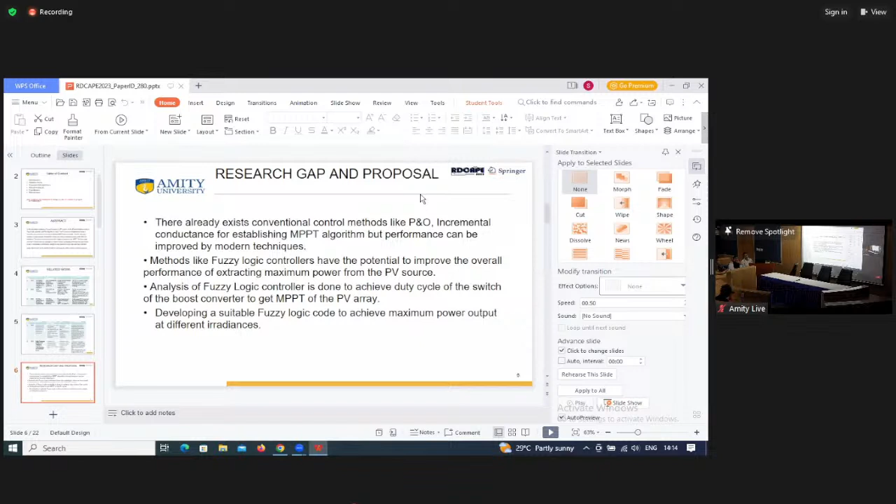So we use a boost converter in this circuit to improve the voltage level in order to get the highest possible output power under different irradiance. These are the algorithms of the Perturb and Observe method and the fuzzy logic which I have used for making the MPPT and controlling the duty cycle of the power converter used in the circuit.

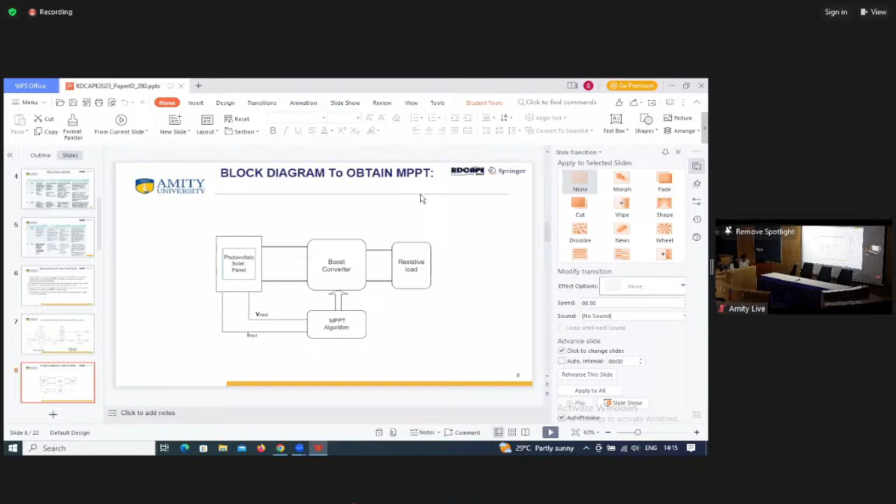This is the block diagram of the circuit to obtain the MPPT. We use a photovoltaic solar panel where we take the input voltage and input current at different irradiances, and then by using the two algorithms we conclude a duty cycle which will be fed to the boost converter switch, so that we can obtain a particular voltage and power on the output side. The output side has a resistive load which has been used to measure the power obtained.

So the system parameters which I have taken are shown below. The resistive load which I have used is 23 ohms, and the capacitor is 1734 microfarad. The inductor used in this circuit is 162 millihenry.

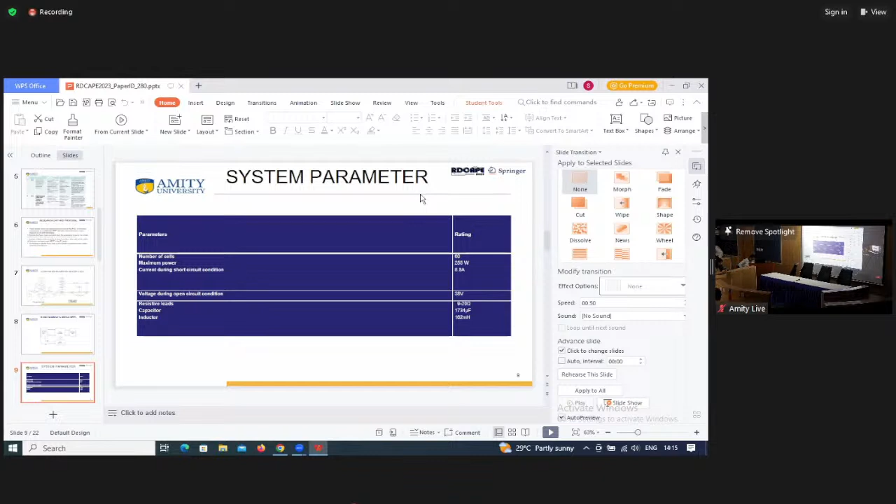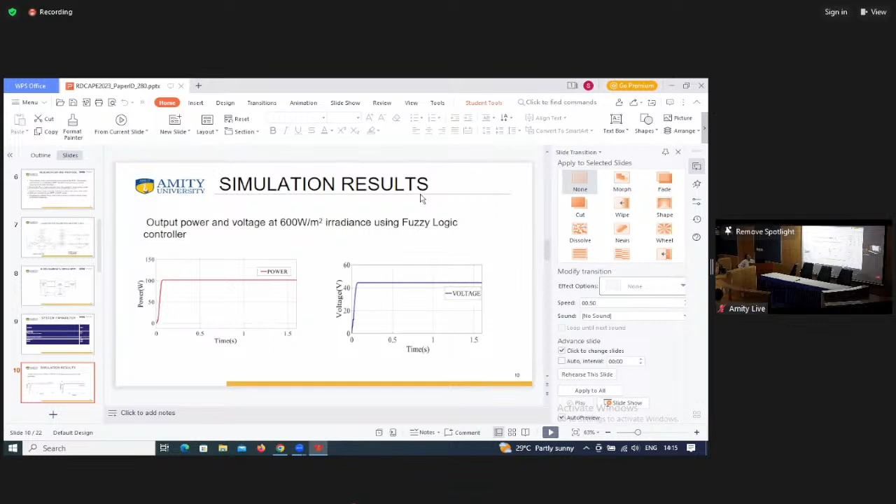This is the simulation results which I have obtained at different irradiances. I have taken three irradiances for comparative analysis: 600, 700, and 800 watts per meter square. This is the result of the power output and voltage output at 600 watts per meter square irradiance using fuzzy logic controller, and this is the 700 watt per meter square irradiance readings. Similarly, I have obtained the 800 watt per meter square results.

In this graph, I have shown the change in output power and voltage at varying irradiance. It is seen that when the irradiance changes, the output power also changes, and the voltage obtained also changes in this resistive load circuit.

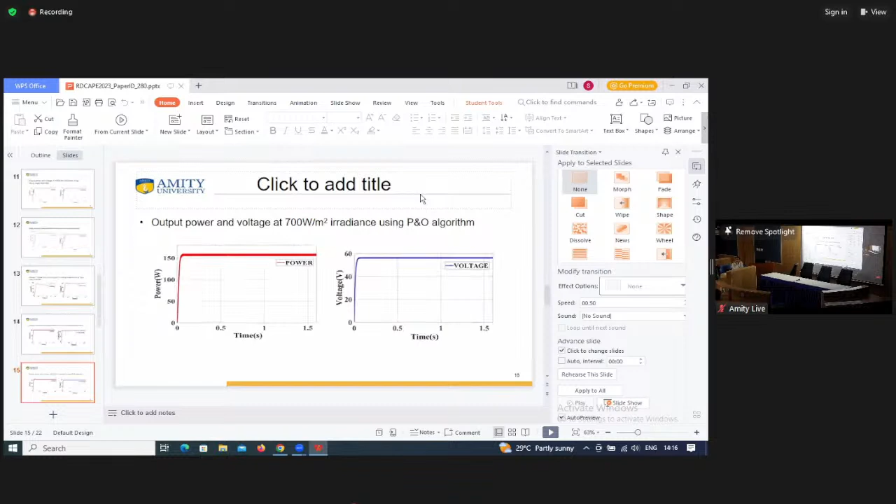Similarly, I have taken the Perturb and Observe algorithm readings at 600 watt per meter square irradiance, 700, and this value is obtained, and even at 800 irradiance. So under the similar condition of changing irradiances with this Perturb and Observe algorithm, we see that the power output and voltage output also change with the change of irradiance on the input side.

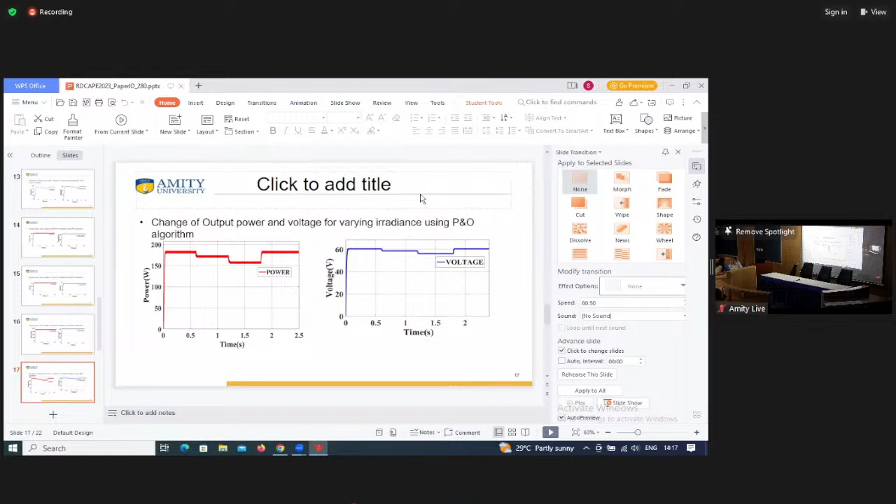So after comparing all the parameters between the two logics under similar parametric conditions, it is obtained that the fuzzy logic extracts much more power and voltage, and the overall efficiency of the fuzzy logic controller is 2% more than the Perturb and Observe algorithm, and this is because of the converter parameters introduced in this circuit.

The conclusion states that this circuit has been designed for MPPT analysis under resistive load condition. As a result, the irradiance changes and the power extracted also changes, and the output voltage also alters because of the change of irradiance. The variable voltage can also be utilized for various purposes, and if it can be made constant, then the power extracted at different irradiance can be used for numerous purposes.

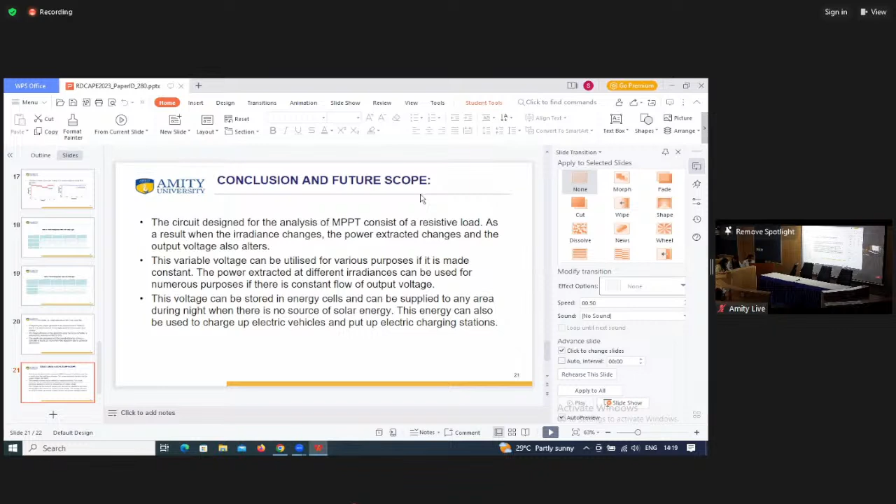Just tell me why you choose fuzzy logic for this purpose. There are various latest algorithms available, for example some meta-heuristic approaches. You may use those algorithms and surely you will get better results.

Sir, the metaheuristic approaches which are being used nowadays also give an output, but the fuzzy logic algorithm I have utilized here is much more efficient than the fuzzy logic algorithms which have previously been used, because of the change of ranges which I have taken by studying all the previous papers and journals for this purpose. In today's world, most electrical appliances are going to use AI and machine learning algorithms to do their work.

In earlier times, the actual problem with fuzzy is that you have to choose the parameters manually initially. How many linguistic variables have you taken here?

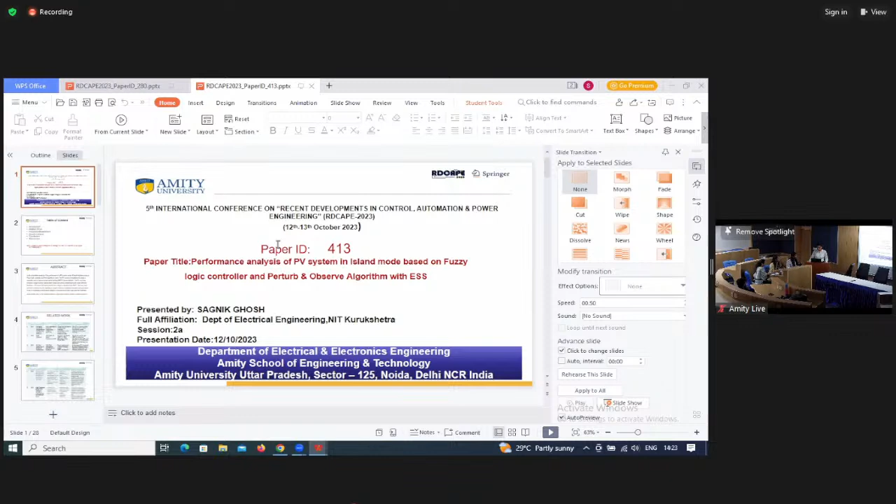Now I am going to present my second paper, performance analysis of PV system in island mode based on fuzzy logic algorithm and Perturb and Observe algorithm with ESS, energy storage system.

So in this paper, like in the previous paper, we have shown the fuzzy logic algorithm and Perturb and Observe algorithm. We have made a comparative analysis between the two algorithms, and we have obtained a certain output based on that.

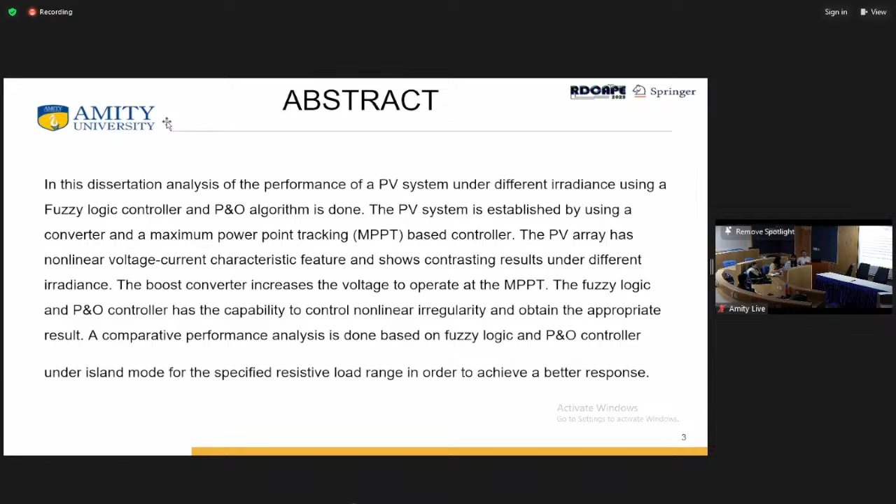By comparing this output, we have observed that when we use a resistive load, the energy obtained on the output side is also varying with the input irradiance. So this energy can be utilized if we can stabilize the voltage at a certain level for change of irradiance. For this purpose...

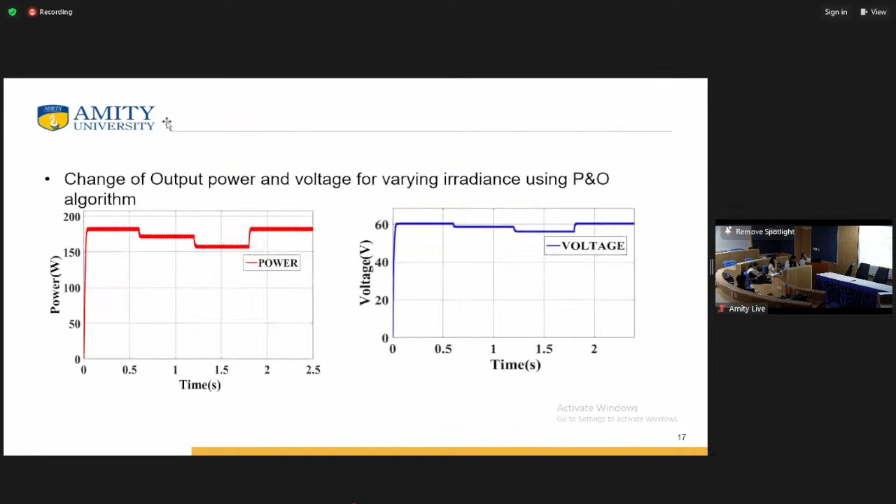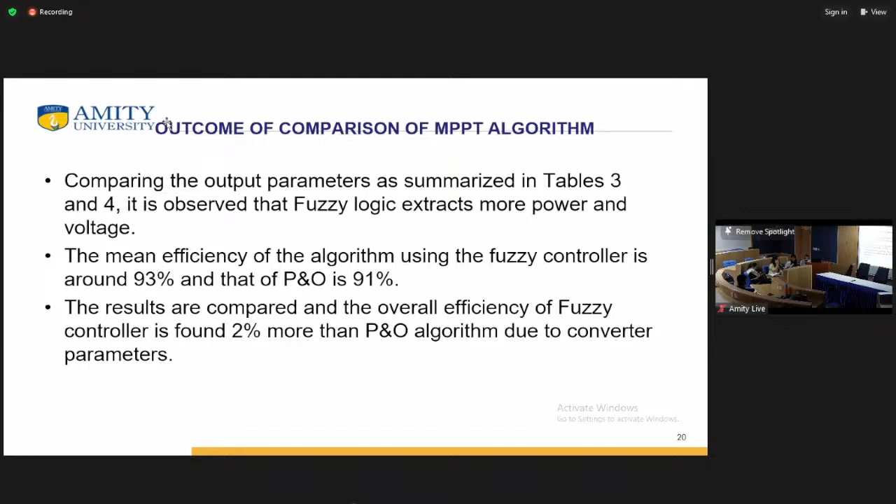I have first compared the two algorithms and have shown that the fuzzy logic algorithm is getting a better result than the Perturb and Observe algorithm. Now this circuit, which has a resistive load, will show this variable change in voltage

on the output side at different irradiance, and this can be solved by using a PI controller on the output part, which will be fed to a battery to store the energy. This energy stored can be utilized by electric vehicles and can also be used for putting up charging stations.

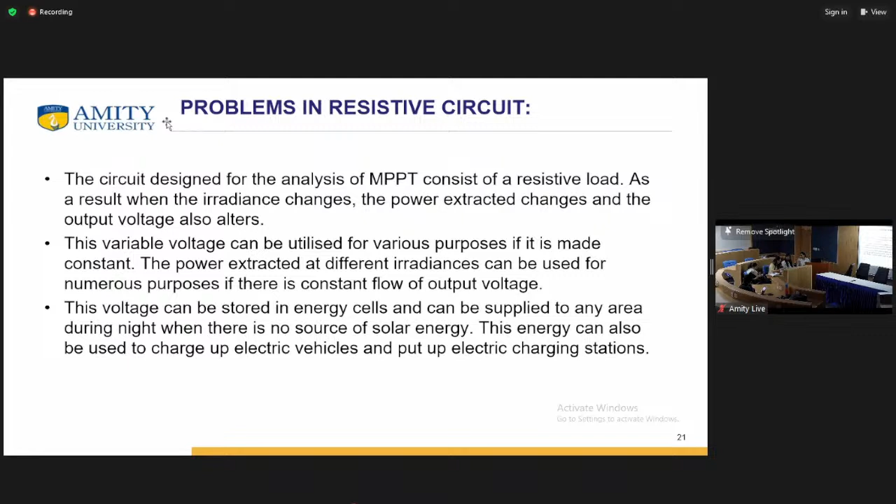This is the block diagram of the circuit which I have made by improving the MPPT algorithms. A PI controller and bidirectional converter has been used across the resistive load, which will be connected to the battery. The battery input, output, voltage and current readings will be fed to the PI controller, which will automatically control the duty cycle of the bidirectional converter for obtaining a constant voltage on the output side at variable irradiance.

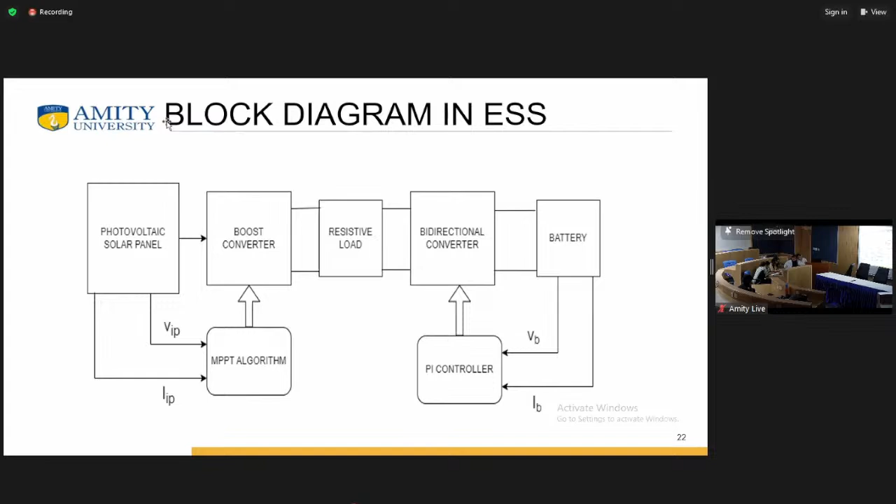This is the voltage, and this is the irradiance which I have taken to show this process. At first, this is the change of irradiance with respect to time, with a time period of 4 seconds taken here. The irradiance is changing from 300 watt per meter to 400, then increasing to 450 watt per meter square, and then decreasing to 400.

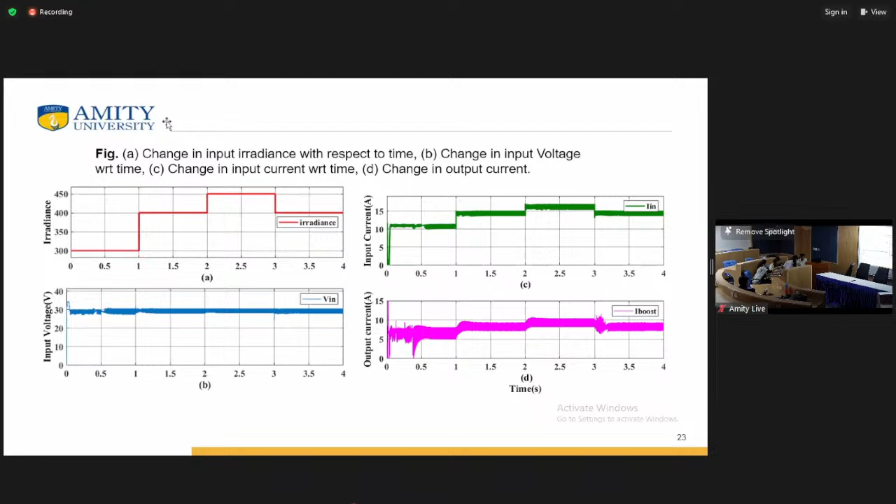Similarly, the voltage on the input side is also varying a little bit, and the input current is also varying. The output current shown will also be changing because of the duty cycle on the input side and the duty cycle of the converters.

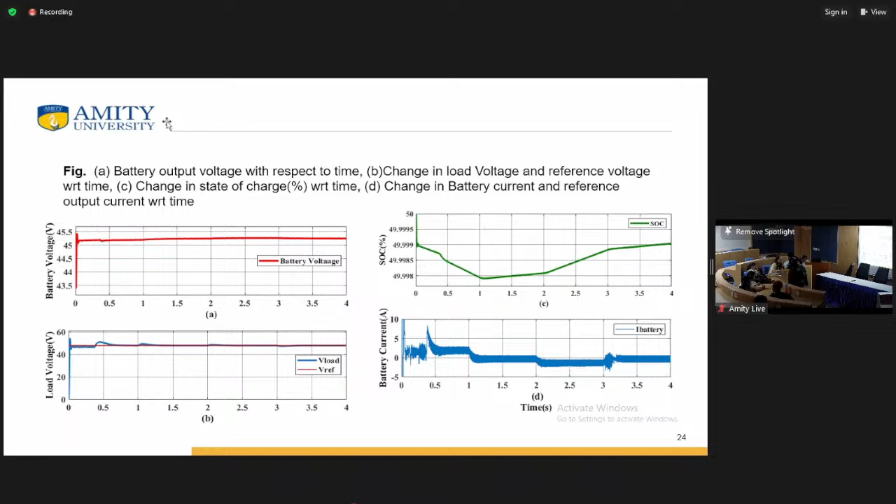The battery current is also changing. At first, when the battery is discharging, the battery current is on the positive side, and when the battery starts charging, the battery current becomes negative and is on the negative side.

The future scope of this is that the system can be used for G2V and V2G operational mode conditions. The charging time has to be reduced through proper planning, and efficient models of charging stations can be designed for extracting optimal power in the least time.

Various developments have been made for making this output system more powerful, and if another automated system can be made on the output side to feed the bidirectional converter, the output can be extracted on the battery side, and the efficiency will also increase.

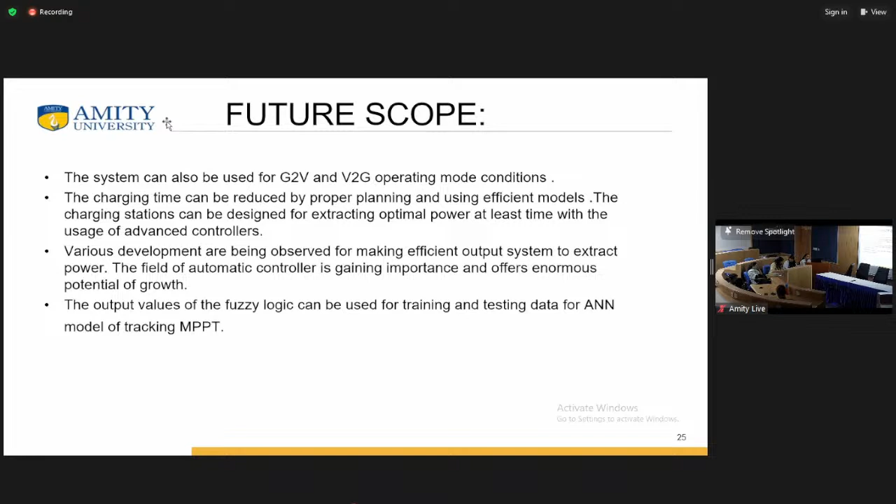The output values of the fuzzy logic can be used for training and testing data for an ANN model for tracking the MPPT algorithm. In conclusion, it is seen that the fuzzy logic is one of the most efficient models when comparing it with the normal incremental conductance method, PI controller method, or even the perturb and observe algorithm. The system is designed to track MPP at various irradiances.

We have also achieved a model where we can stabilize the output voltage so that we can use it for the battery, and for other purposes, especially for charging electric vehicles, and also for sending electric power for other purposes in places where there is no supply of energy.

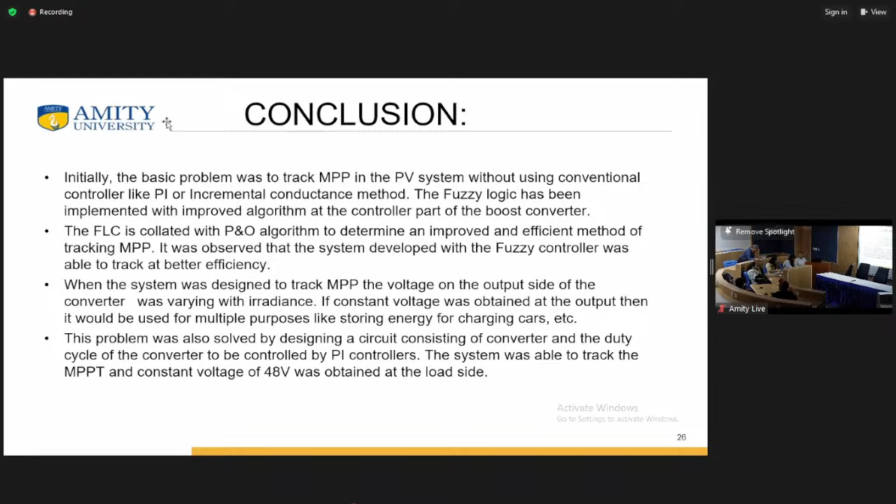A constant 48 volts is obtained at the resistive part when using this bidirectional converter, and a PI controller has been used for these purposes. These are the references which I have taken for solving this problem.

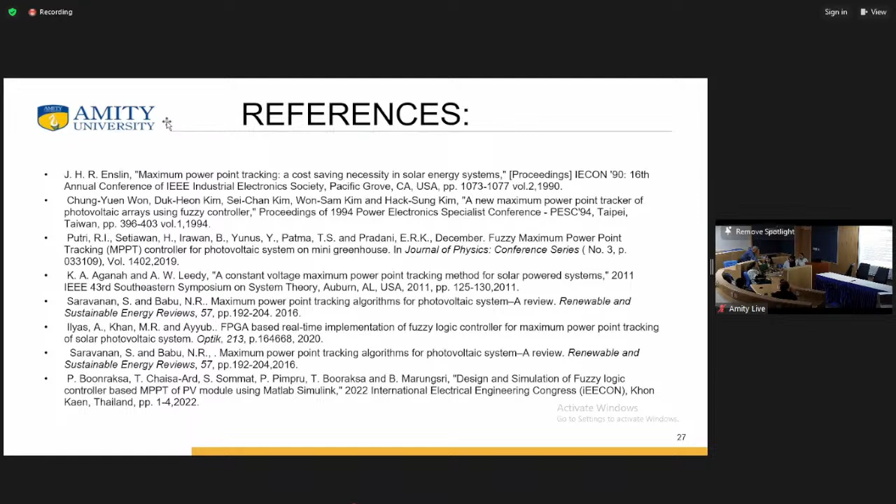Sagnik, you said that you utilized a PI controller for the converter, for the duty cycle control, okay? For the bidirectional part, bidirectional duty cycle control. So, in that case, how did you tune the parameters of the PI controller?

Sir, at first, I tuned it by taking the KP value and KI value, and then I used the auto tune. I made the circuit and used it for auto tuning purpose.

That is part of the tool, but you should know what is that method. Yes sir, Ziegler Nichols method, in auto tuning. Sir, no, not in auto tuning. I used the auto tuning, and then I slowly tuned it by calculating the range.

When you auto tune, there is basically no requirement to utilize any other method. I want to know what is the method to utilize to get the optimal parameters of KP and KI.

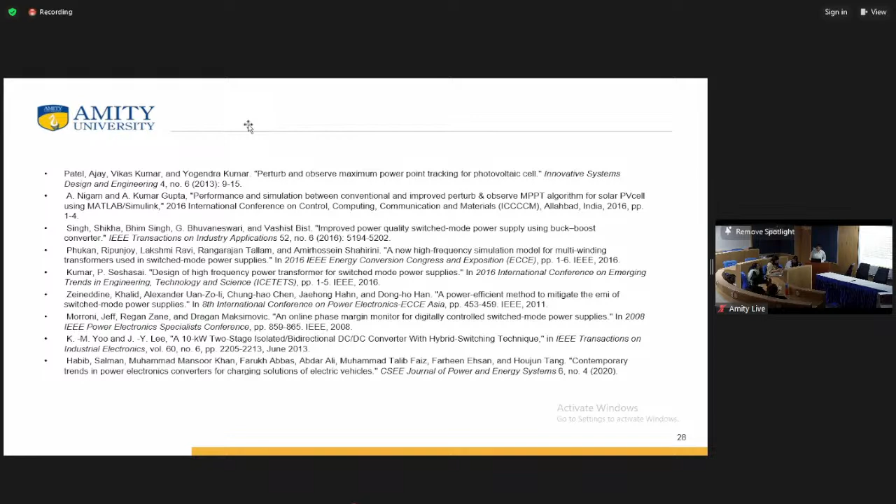Next, paper ID 289, tuning of PI controller using genetic algorithm and differential evolution algorithms for closed loop single switch semi-quadratic buck converter, by Devadip Sen.

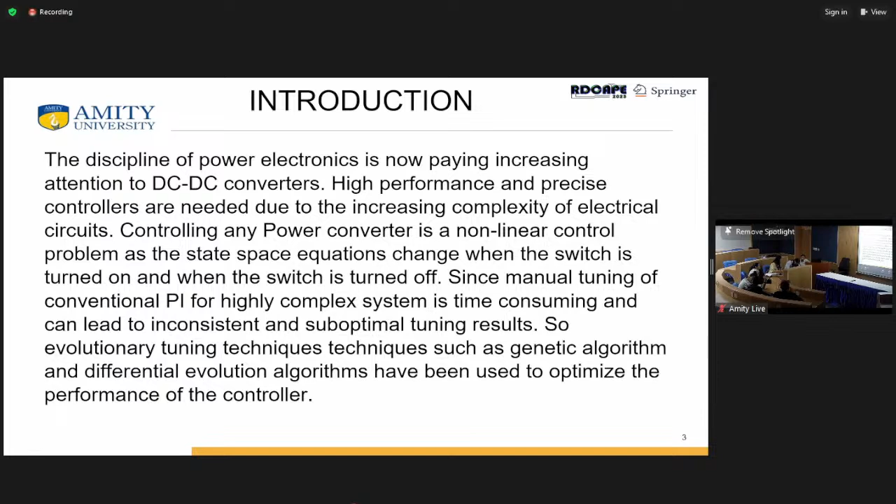Since manual tuning of PI is conventional, tuning techniques have been used, such as genetic algorithm and differential evolution. Reasons for choosing algorithms for tuning PI: first, optimization capability. Evolutionary algorithms such as genetic algorithm and differential evolution excel in solving optimization problems. The tuning of PI controller involves finding optimal values for proportional and integral gains that minimize the specific performance criteria.

Coming to the second point, no explicit model is required. In case of other artificially intelligent controllers, we require information regarding the model. In case of tuning such complex systems, we don't require any prior model information. We can simply use the evolutionary algorithm. Coming to the next point, that is handling nonlinear systems.

Many real world systems exhibit nonlinear behavior, making the control design process more challenging. Evolutionary algorithms are well suited for handling nonlinear systems since they can effectively search for solutions in complex and nonlinear solution spaces. Coming to the last point, that is computational efficiency.

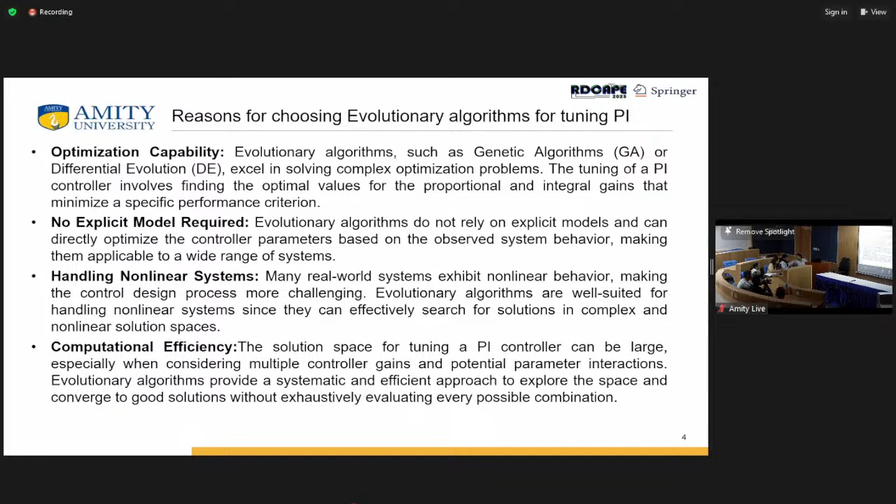The solution space of tuning a PI controller can be large, especially when considering multiple controller gains and potential parameter interactions. Evolutionary algorithms provide a systematic and efficient approach to explore the space and converge to a good solution without exhaustively evaluating every possible combination. Coming to the related work, these are the related works that I've gone through.

In a standard buck converter, the output voltage is linearly proportional to the duty cycle of the switching signal. However, in a single switch semi-quadratic buck converter, the relationship between duty cycle and output voltage is linear for a small input voltage and quadratic for a large input voltage. As the name suggests, semi-quadratic, that is the reason mainly we cannot use standard buck converters.

This non-linearity complicates the control design, as traditional linear control techniques may not be directly applicable. The switching action itself introduces non-linearities. The abrupt switching transitions can cause discontinuities in the system behavior. The inductor and capacitor used in the buck converter can exhibit nonlinear characteristics due to the presence of parasitic resistance. Here, the parasitic resistance considered is 0.1 ohm in case of my analysis.

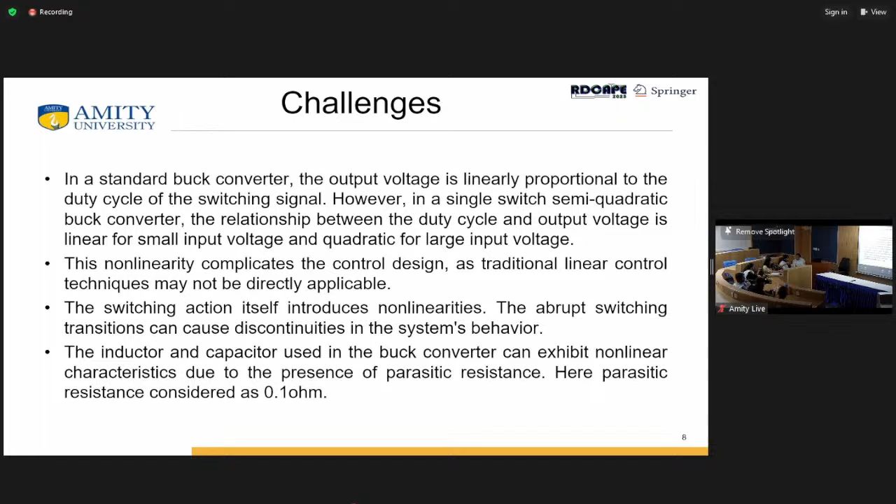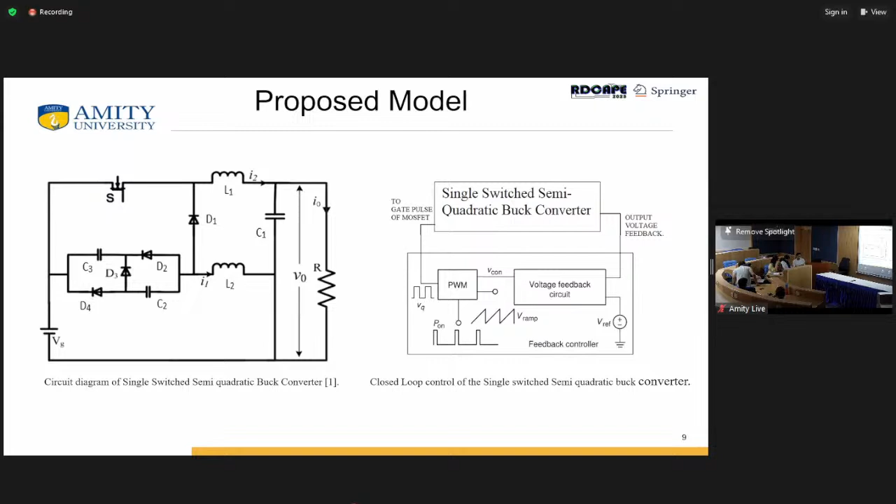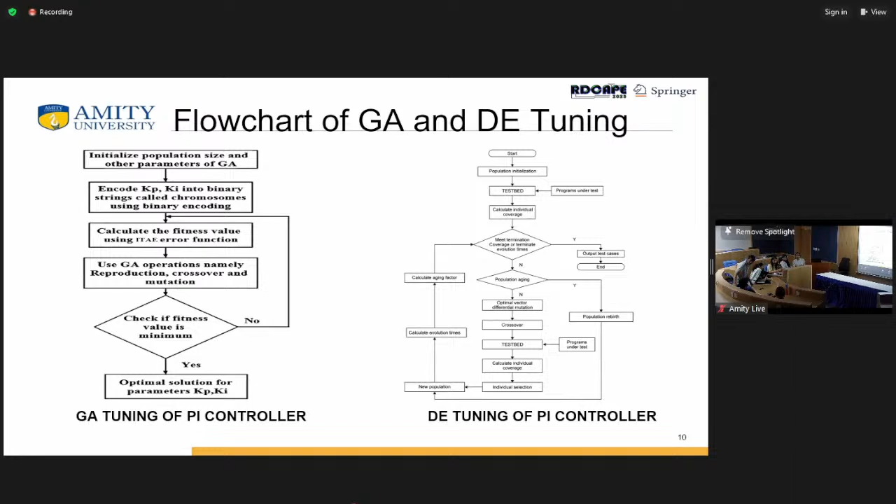Coming to the flowchart, this is basically the workflow that has been followed for tuning the PI controller for both cases, that is genetic algorithm and the differential evolution algorithm.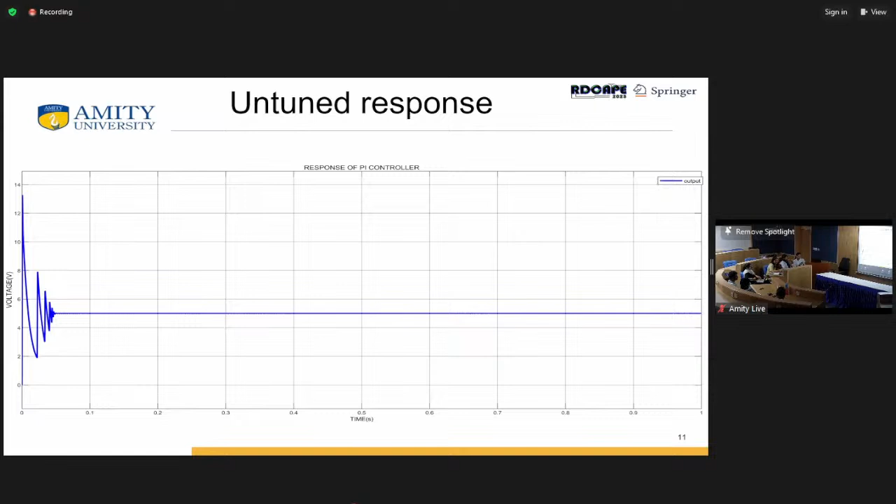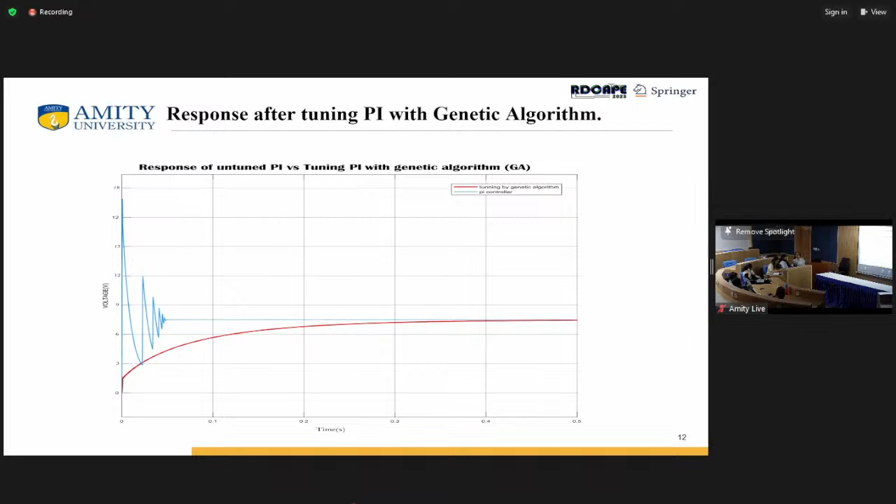Coming to the untuned response, this is the response that is not tuned. It has been improved after tuning it with genetic algorithm. Coming to the differential evolution algorithm, we can clearly see that the response is much better.

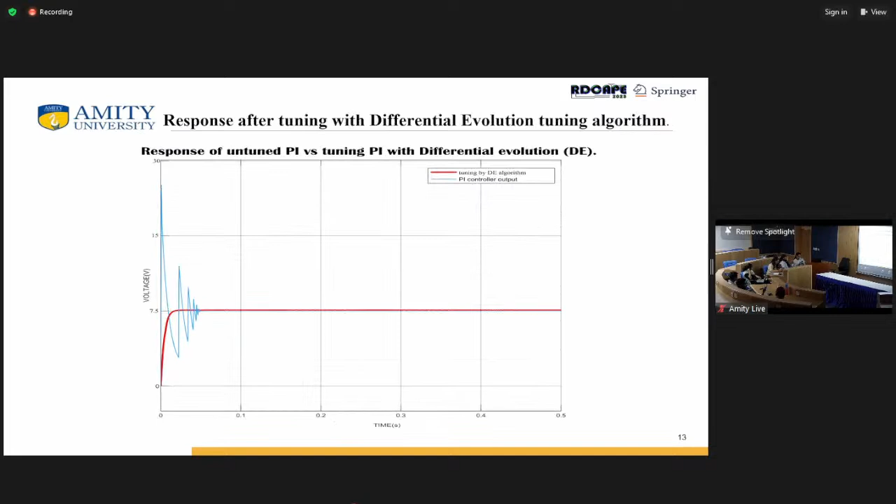So coming to the result and analysis, it can be clearly seen from the response that the genetic algorithm response in the figure below is slower than the differential evolution algorithm. It happens due to the mutation strategy that allows DE to explore the parameter space more efficiently and effectively than the mutation operators used in GA.

DE typically requires fewer fitness evaluations compared to GA. DE has a reputation for faster convergence to optimal solution, and DE has fewer parameters to tune as compared to GA.

The red color in both graphs shows the response of the tuning algorithms, while the blue color shows the untuned PI response. The table below shows the performance results. We can clearly see that both algorithms had no overshoot, no oscillations present, but the main difference was that DE gave a faster response, and GA gave a bit slower response.

Coming to the application, many components like microprocessors and sensors require stable and precise low voltage to operate correctly. Electric vehicles have batteries to supply various electrical components in the vehicle. The battery voltage needs to be stepped down. Maintaining a low constant voltage helps protect the batteries and improve their lifespan.

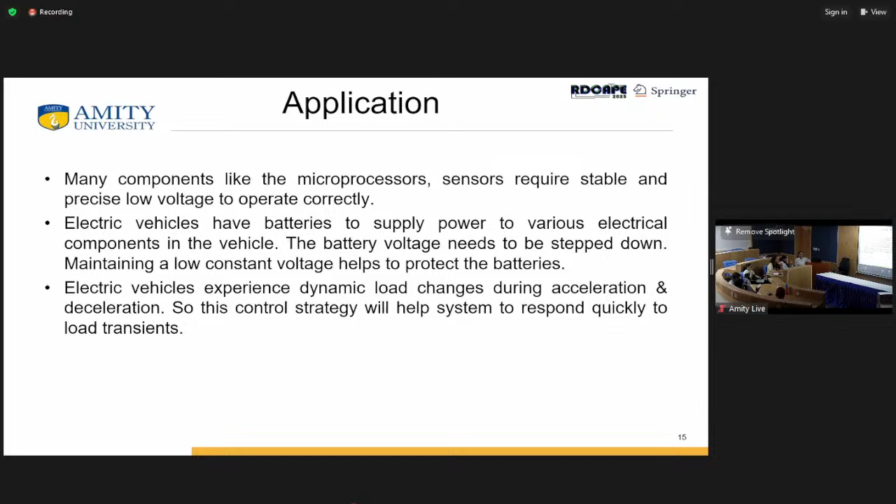Coming to the conclusion, this paper presents the control strategies for a highly dynamic single switch buck converter. The mathematical modeling and simulations are done in MATLAB and Simulink.

The untuned PI controller gives a response with less overshoot and faster settling time. But on tuning the PI controller with the evolutionary algorithms, the results of PI were improved to a great extent. The voltage and current ripples were kept extremely low.

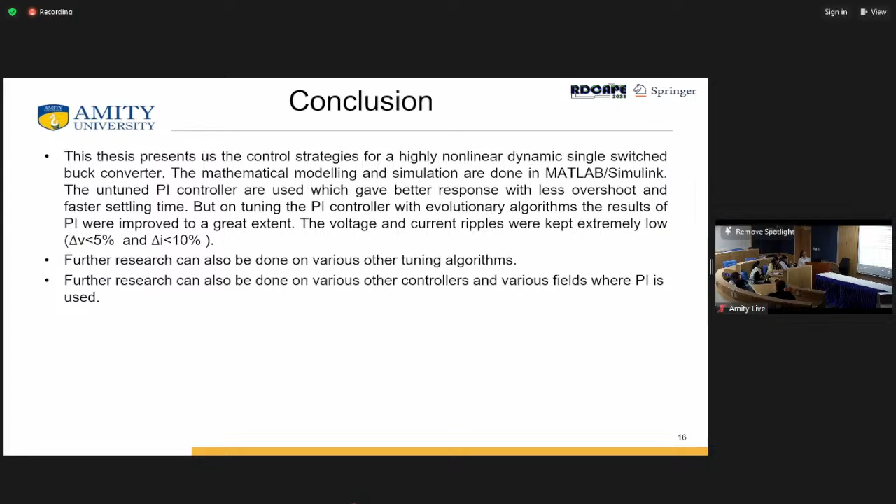Further research can also be done on various other tuning algorithms, and further research can also be done on various other controllers and various fields where PI has been used. So these are my references. Finally, thank you.

Devadeep, yes sir, I have two questions. The first one is, why did you compare the results of these methods with the untuned PI? What is the meaning of that? Sir, actually I wanted to show the result that while it is tuned, it's performing better. Just a comparison, nothing much.

Untuned means you have not utilized any method, just put random values. Yeah, it's a random initialization. Oh, this is not the way to compare the results of any controller with any other. You have to utilize some standard method, or we can say some conventional method, right? Yes sir, I mentioned that. Then you can compare. So this is one of the questions.

And another one, why did you choose PI? Why not PID? Sir, actually PI is more used in industries. So how you can say that PID controller is not utilized? It might be that the D value is zero. So might be zero, yes, okay sir, D value is zero.

Yes, why D is zero? Sir, because the D part increases the noise. If any noise is present in the system, then it will get amplified at high frequencies. But we generally utilize low pass filters with PID.

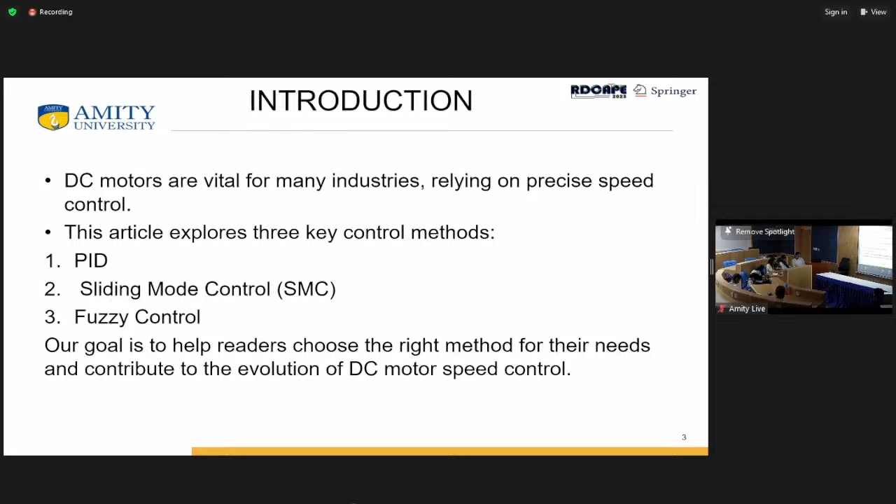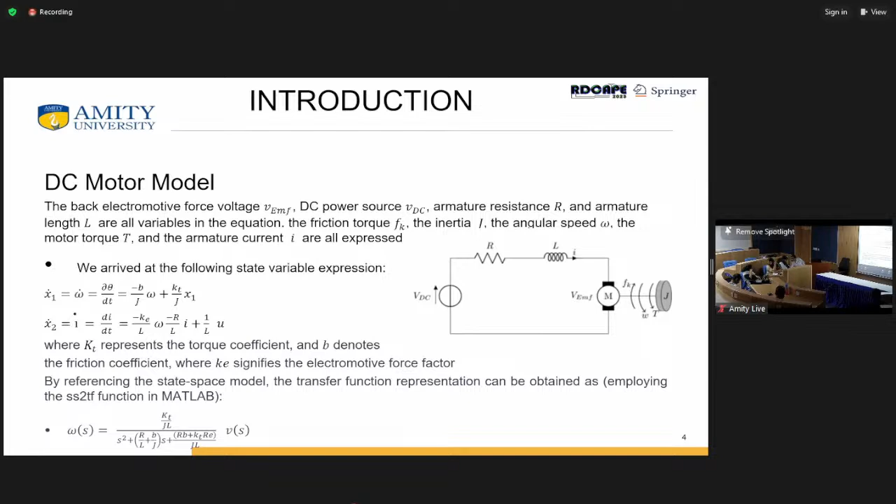After that, I designed my sliding mode control. For sliding mode control, first I had to convert my DC motor control into controllable canonical form.

After that, I chose my surface equation, and for this I wanted some equilibrium condition. I wanted one surface on which my system will be stable, so I used a Lyapunov function: V equals half s squared, where the lambda 1 and lambda 2 I chose should fulfill Hurwitz's condition.

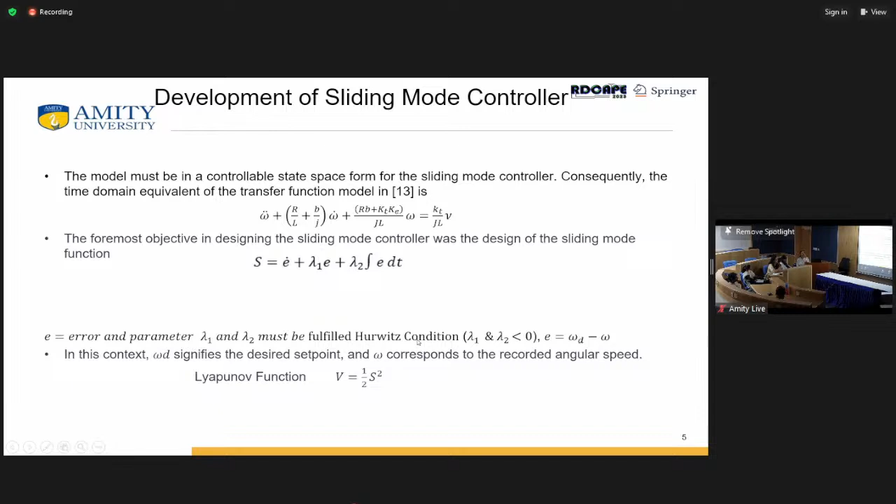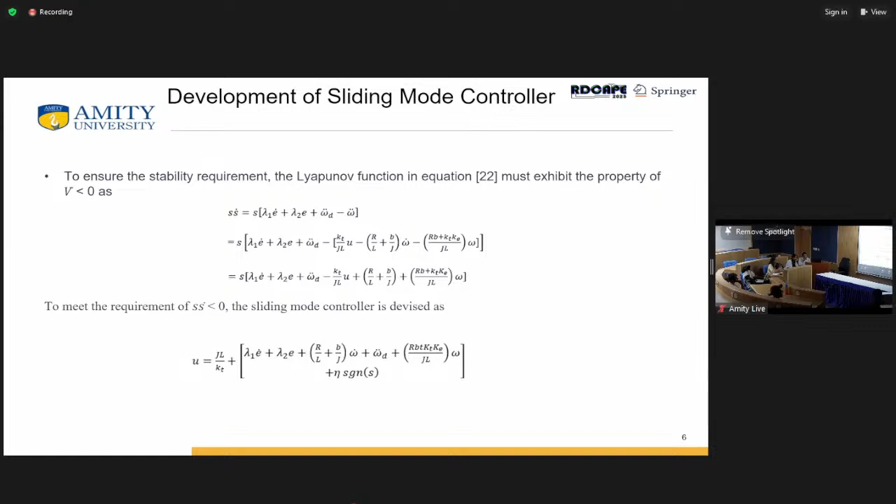After fulfilling the condition, I got s, and s-dot is less than zero. For that, I had to derive one controller: u equals JL by kt, lambda 1 e-dot plus lambda 2 e plus R by L plus b by J. This is the controller I got, and for my DC motor transfer function I used these values along with the signum function.

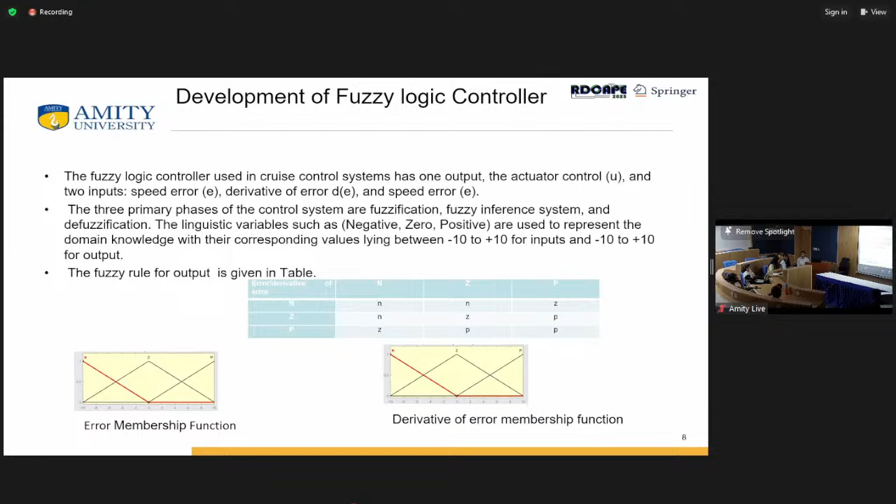After that, I used fuzzy control. My main focus was on sliding mode control, so for this fuzzy motor control I used the Mamdani model, giving speed error and derivative of speed error as inputs.

After that I used PID control, applying the Ziegler-Nichols method. First, I set the KP value, then checked the response of my graph, and accordingly increased my KP values, then entered the KD and KI values, using a table for how to choose the PI values, like KU by 2, and so on.

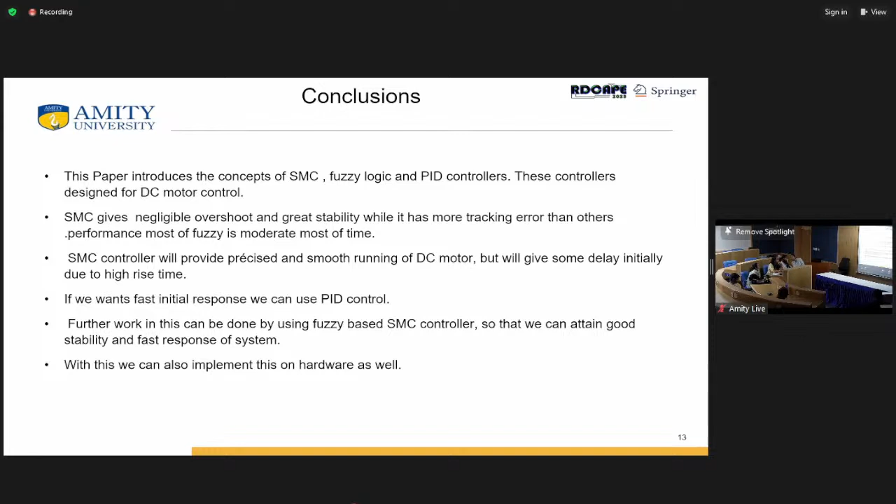So when I saw the conclusion, I got less chattering effect in SMC, and fuzzy is behaving moderate. It has very less undershoot. If I compare these three methods, fuzzy is better in terms of less undershoot.

DC motor is widely used in home appliances, new technologies, and electric vehicles. If we want adaptation, we will go to fuzzy logic control. If we don't have much non-linearity or distortion, we will prefer sliding mode control. And if we want our model to be simple with very less rise time and complexity, we will go to PID control.

So that's all from my side. Thank you. These are the references I took.

Priyam, what is the set point of your motor? Set point, I just used one unit - speed, I was given 1 meter per second.

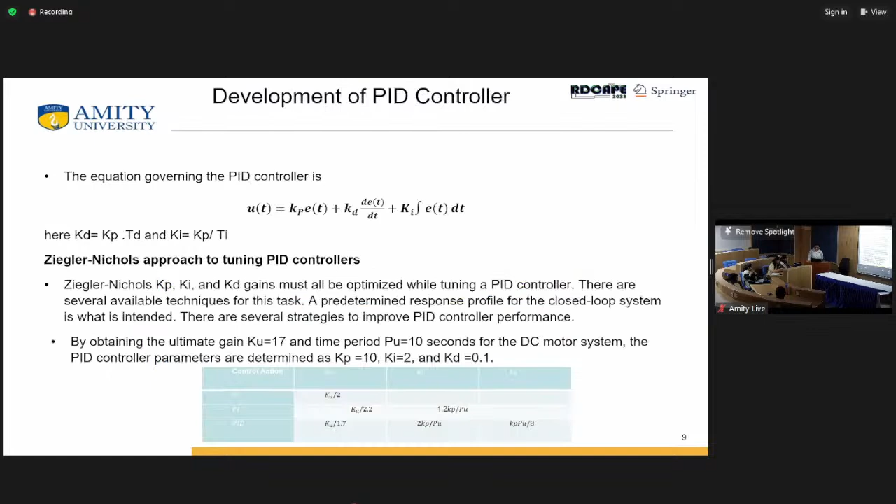But you have taken a constant set point. Yeah, I did constant set point. You can analyze only when you utilize a variable set point, variable with time. Any set point variable with time, then you can check whether your controller is tracking the set point properly or not.

And other question - there are various comparative indices you utilize here: rise time, overshoot, undershoot, settling time. Which one is more appropriate for your application, or more important?

I am talking about these comparative indices - rise time, settling time, slew rate. So which one is priority in this application? Overshoot.

I just prefer overshoot. But an important term you missed here, that is the steady state error.

That's why this is compared to slew rate, because in slew rate it is more prone to distortion. So I just check slew rate for things like distortion.

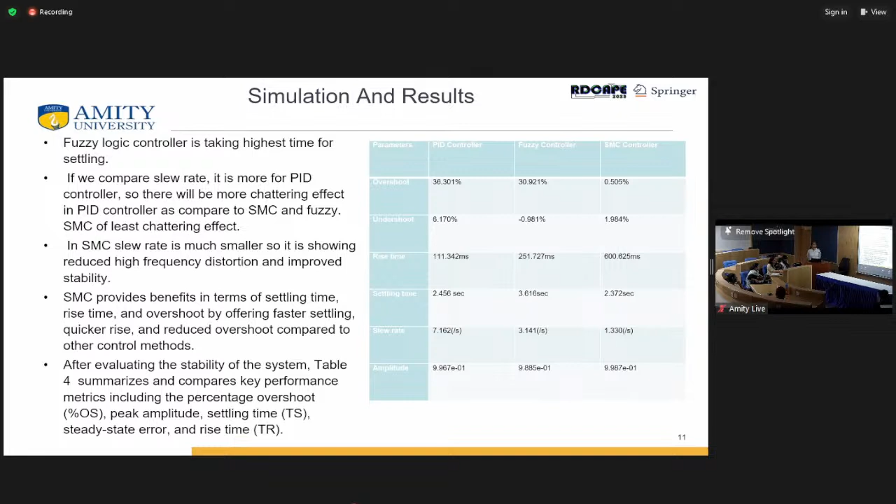What is steady state error? It's like the desired value, and whatever we are getting, the difference is the error. That is very important. If you are giving some set point, it is very important to achieve that set point.

You have to check whether steady state error is within the limit, plus or minus 2% or 5%, whatever you choose. Okay, sure. Thank you.

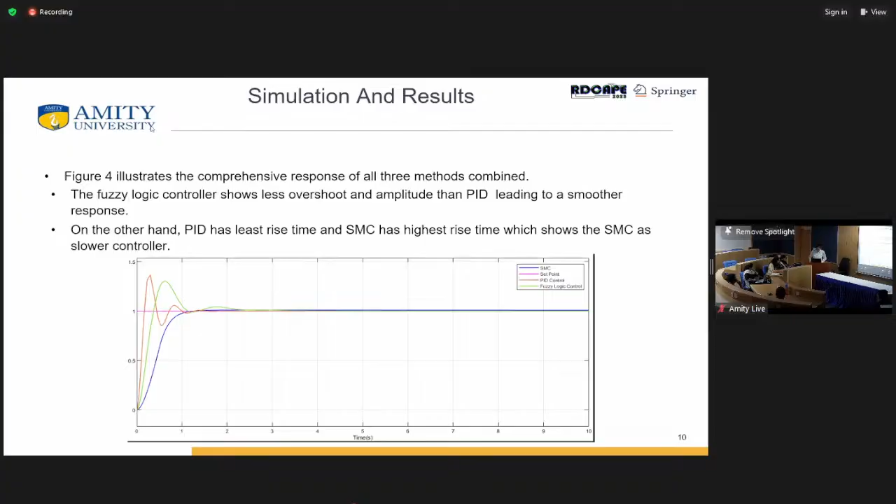Any more questions? No, thank you ma'am. Next paper, ID 301: design and implementation of an automated conveyor belt system with speed control.

Size sortation, and IoT data publication. Presented by Devraj Gautam.

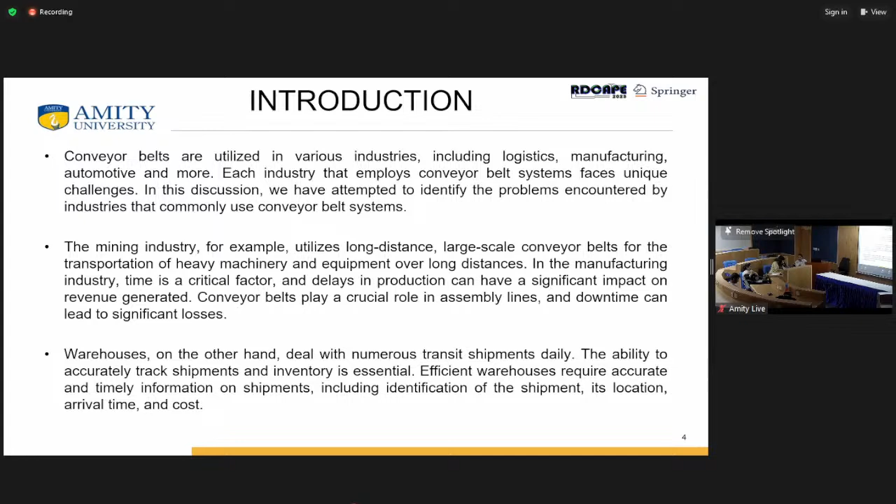From this warehouse concept I got the idea, and this became our aim. So we had to do some work on this, and that's why I chose this option.

The modern conveyor belt, which we are updating with IoT, initially started in 1892 for the transportation of coal. Assembly lines utilizing conveyor belts were first introduced by Henry Ford in 1913. Since then, conveyor belts have undergone various advancements, and currently the industry is at the threshold of another strategic change.

This integration allows us to publish real-time data to the ThingSpeak through the IoT platform, so we can access the actual process of the conveyor belt remotely.

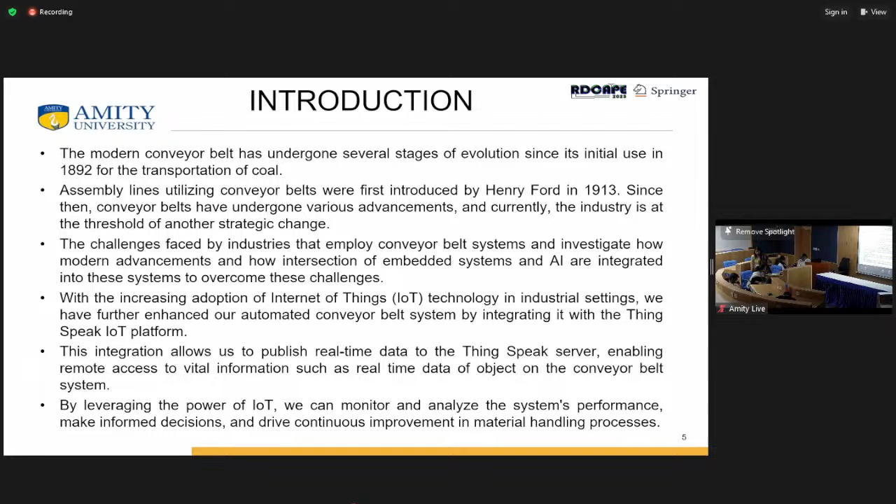These are some related works which have already been done by other researchers. Recent studies focus on the integration of Raspberry Pi, OpenCV, and image processing methods, which have drawn a lot of attention in the field of object detection and separation. Numerous researchers have looked into how these technologies might be used to create novel solutions for such applications.

An approach for object separation and detection using Raspberry Pi was put forth by Walam et al. in 2018. In another paper from 2015, objects of different sizes are passed to the sensor, and the object having the specified size is sorted. So already in 2015, work had been done to extract the size of different objects, pass them to the sensor, and sort the object having the specified size.

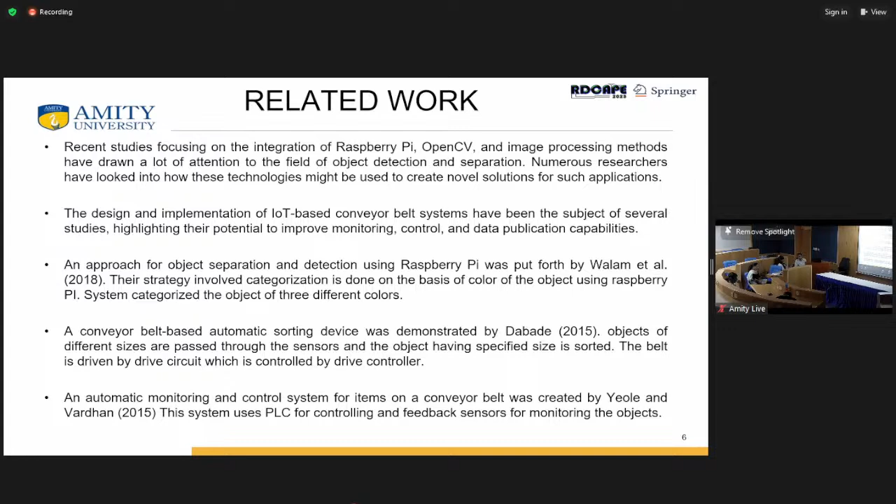Mr. Devraj, kindly present your work. Okay, note literature review required. Kindly go to your... okay sir. So at the end... yes sir. So I have passed the related work, and this is the conclusion of the related work.

Our research paper presents a novel and cost-effective automated conveyor belt system with integrated speed control. First, our work was to design a conveyor belt. Second, to control the speed of the conveyor belt. Third, to place a tripod stand onto the conveyor belt with a camera attached, which will find the contour area of the object placed on the conveyor belt, and based on that we determine the actual size of the object. That data will be detected and, after data processing, given to the Raspberry Pi, which will show the data on the display unit, an LCD display, as well as on ThingSpeak with the help of the IoT platform.

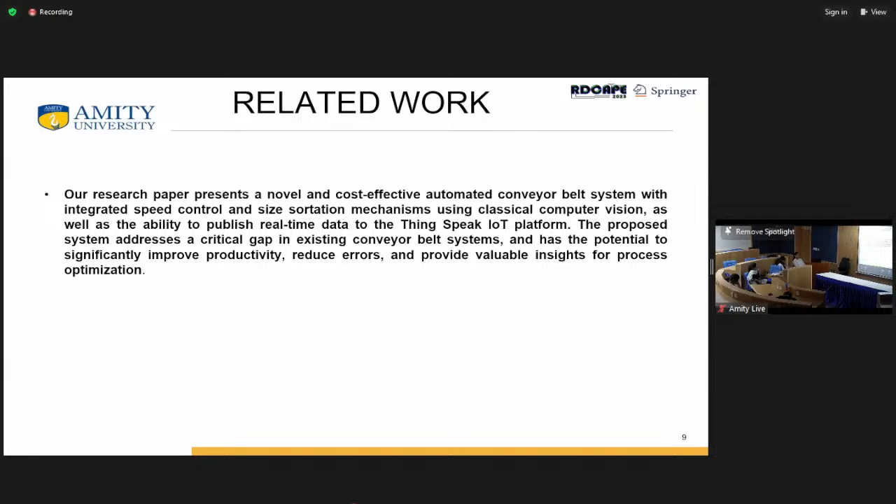These are some objectives: to design and develop a cost-effective, advanced electronic material handling system. If the conveyor belt is properly designed and controlled with speed control, the labor requirement becomes very low. We integrate speed control features into the conveyor belt system and incorporate object detection and classification capability.

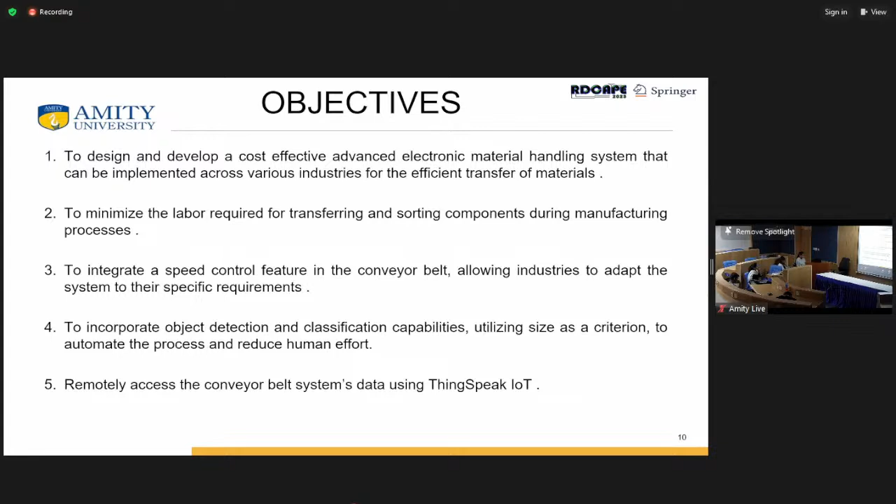Remote access of the conveyor belt system is achieved using ThingSpeak, which is the advancement. These are the design and implementation parts, which basically consist of two sections.

First is the blue, shown by the sky blue shade, in which the Raspberry Pi is connected with the power supply, and Raspberry Pi is further connected with the USB camera as well as LCD display and the user's ThingSpeak. So with the Raspberry Pi giving data to the ThingSpeak app, we can extract the data or find it on the ThingSpeak platform.

And in the lower portion, pink shows that the battery is connected with the speed controller mechanism and conveyor belt we can control.

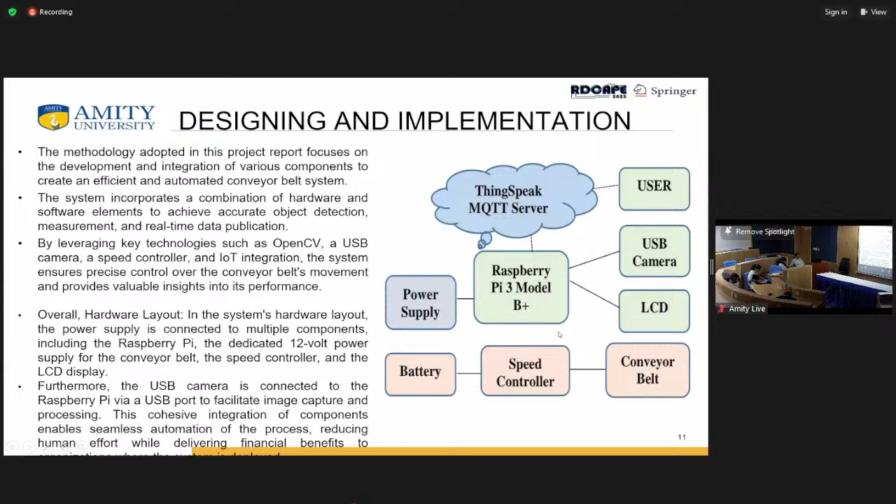And in this section, we can see the figure above depicts the back end of the system, where the size classification takes place using a Raspberry Pi and OpenCV library. These images show the implementation of the sorting feature, which is an important aspect of the project. On the left, it presents a case that is deemed not required.

So this is the Raspberry Pi, and this is the actual object which is conveyed through the conveyor belt. Here we are using the nut, and different types of nuts. It exactly shows what we have manually observed as the shape and area of the nut, and after using the conveyor belt, the ratio has very little difference - otherwise accuracy is more than 95%.

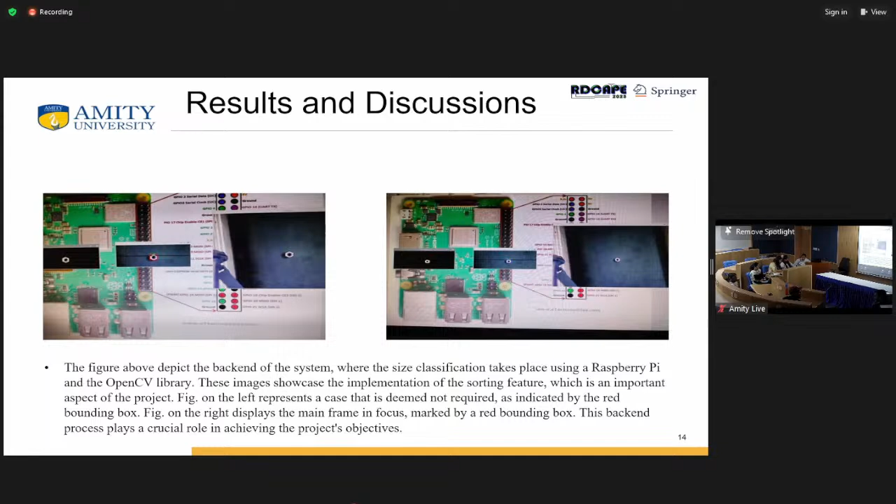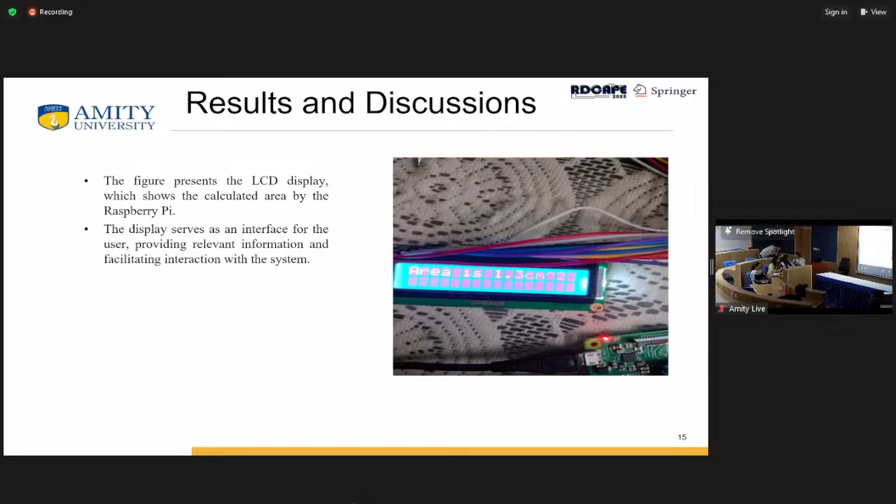The integration of IoT in an automated conveyor belt system has significantly enhanced its functionality and capabilities. In addition to object detection and size classification, the system seamlessly uploads relevant data to the ThingSpeak platform. So if the data is on ThingSpeak, we can observe remotely and control the speed with the help of the IoT platform. That's why we are using the Raspberry Pi to control the whole process.

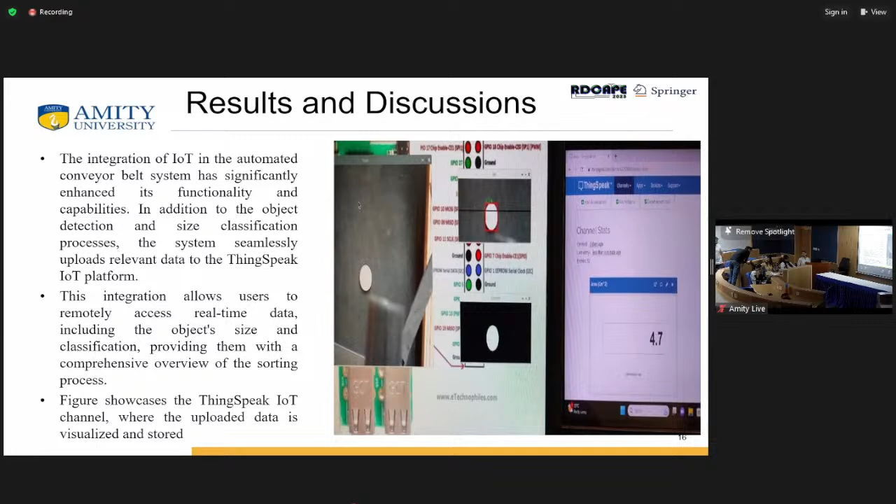And a display unit is there in front of the technician, who will handle the conveyor belt. So directly we can observe in text mode, as well as access it remotely. So this is a graphical representation.

Sir. Just a minute, sir. Just a minute.

This is the conclusion part. The contour detection algorithm was able to process images from the USB camera and identify the contour area of the object passing through the region of interest. The system was able to accurately calculate the area of the object. The LCD attached display the area accurately.

The DC gear motor controlled by pulse width modulated speed control successfully varies the speed of the conveyor belt system and provides enhanced control of the system. The integration of IoT further enhanced the automated conveyor belt system capabilities, allowing for real-time data access and remote monitoring.

So this basically shows that we can remotely access the data, and we have displayed the data on the LCD display as well. The accurate object detection, size classification, and IoT integration collectively contribute to an efficient and reliable object sorting solution. So basically this paper's outcome demonstrates the successful implementation of IoT integration, offering users a comprehensive and advanced system for sorting needs.

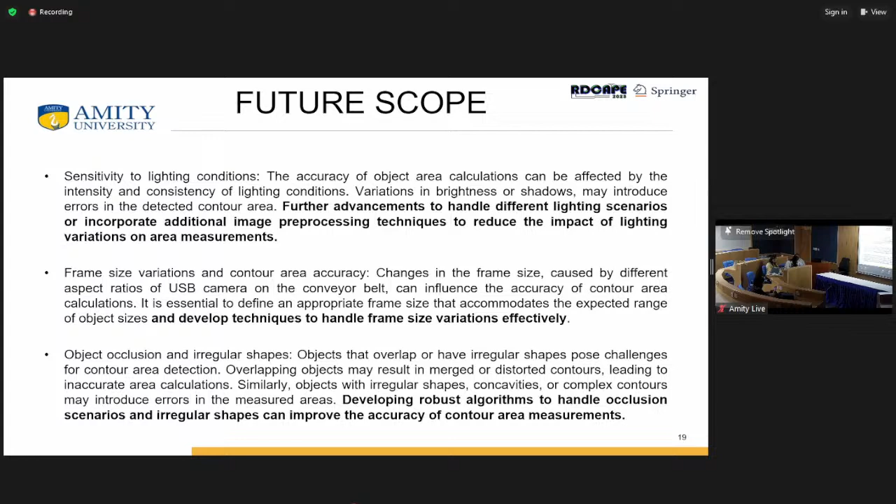That's why we have to do some work on that, to show the exact data. Threshold and parameter selection is a very important part, so we have to work on these parameters and on enhancing the sorting algorithm.

In summary, the future scope of this research lies in further improving the sorting algorithm by incorporating machine learning techniques. If the machine learning technique is strong, we can compare the data with existing data in a very short period, and we can understand whether our data is in the accurate process or has some error.

Have you utilized this sorting of different types of objects, or have you only done size classification? Sir, right now sorting is not there. We have only found out the area, the particular area of an object. So it means you utilized only a camera.

Yes sir, no other sensor is utilized. So it means there is no IoT. No sir, actually we are sorting based on the particular area we found out, and that area data is given remotely. With the help of IoT we convey the exact data, so IoT is utilized with the camera, but no IoT-based sensor is utilized. No other sensor, distance sensor, or color based sensor.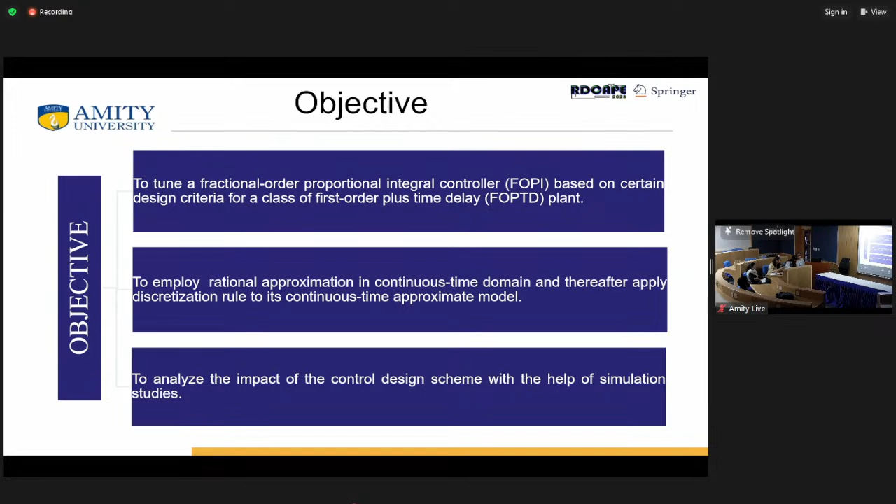To this aim, we have three objectives. First is to tune a fractional order proportional integral controller for a class of first order plus time delay plant. Second, to employ the rational approximation in continuous time domain, and then apply the discretization rule to its approximate model. Finally, to analyze the impact of the control design scheme with the help of simulation results.

Talking about the design methodology of the FOPI controller, first we have considered a first order plus time delay plant with time delay 0.01 seconds, given by P of S. The transfer function of the FOPI controller is given by C of S.

Kp is the proportional gain, Ki is the integral gain, and beta is the fractional term; these three are the unknown parameters which need to be determined. On connecting the plant with the fractional order controller, we obtain the open loop transfer function, given by G of S as shown in equation number 3.

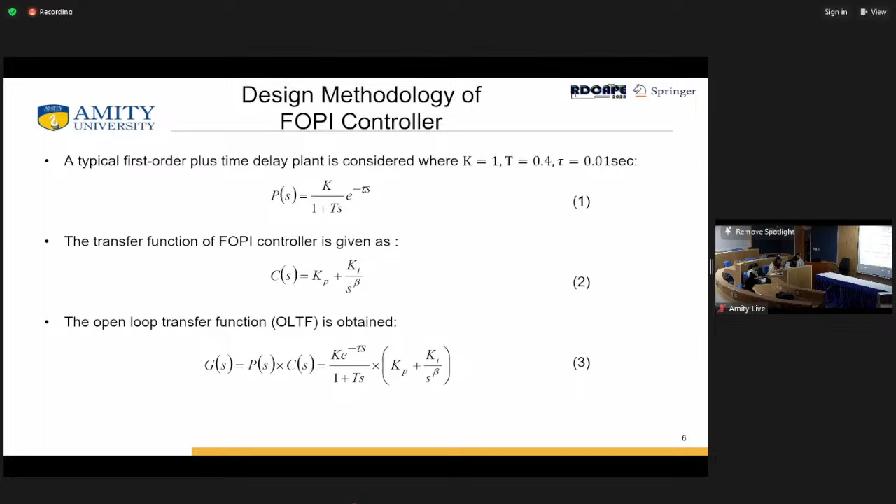The plant model needs to fulfill certain design criteria, and for this case we are considering four design specifications. First is the gain crossover frequency criterion, where the magnitude of the open loop transfer function at gain crossover frequency is equal to 1. Second, the phase margin criteria, where the phase of the open loop transfer function at gain crossover frequency is equal to minus pi plus phi m, where phi m is the phase margin.

Third, the gain margin criteria, where the magnitude of the open loop transfer function at the phase crossover frequency is equal to 10 to the power modulus of Gm by 20, where Gm is the gain margin. Fourth, the phase crossover frequency criterion, where the phase of the open loop transfer function at phase crossover frequency is equal to minus pi. For tuning the FOPI controller, we have used the loop shaping method, which is the frequency frame approach.

From equations 4 and 5, we have derived simpler expressions of the controller parameters Kp and Ki with respect to the gain crossover frequency and its related phase margin, shown in equations 8 and 9. Similarly, another set of expressions for Kp and Ki are obtained with respect to the phase crossover frequency and its desired gain margin.

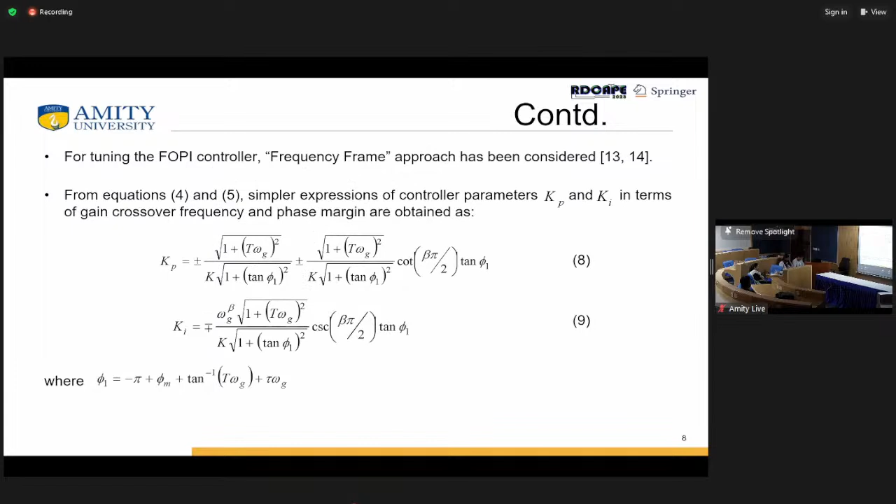Now, on equating equation 8 and equation 10, we have obtained a curve which shows the relationship between the fractional term beta and 10 to the power modulus Gm by 20. Similarly, another curve can be obtained by equating equation number 9 and 11.

On plotting both curves, we obtain the value of beta graphically, given by the point of intersection. With the help of this point of intersection, we can determine the other values like Kp and Ki.

Once the continuous time FOPI controller is designed, we shall apply the Oustaloup approximation technique, and the nth order Oustaloup approximation for the frequency band of omega b to omega h is given by equation number 12. This equation provides us the integer order transfer function of the s to the power beta term.

Thereafter, we apply the discrete time realization, which is done using the Al-Alaoui operator, and for a sampling time delta, we have the relationship as shown in equation number 13. This shows the S to Z domain mapping relationship.

Now talking about the simulations and results, we have considered the gain crossover frequency to be 10 radian per second, then phase crossover frequency to be 150 radian per second, and phi m to be 60 degree.

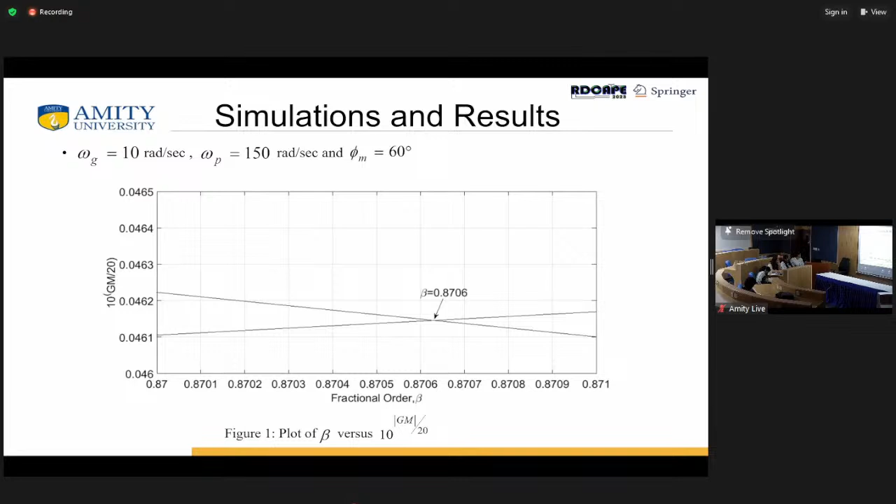Now, on substituting these values to the related equations and plotting the two curves, we see that the point of intersection is 0.8706, which is the beta value, and with this value we compute and determine the value of Kp and Ki as 2.7086 and 19.37 respectively.

Now, connecting this section of the controller to the plant, we obtain the continuous time open loop transfer function as shown in equation number 15. We see that in equation 15 there is a fractional order term, s to the power 0.8706, which needs to be approximated, and we apply a fifth order Oustaloup approximation for that.

We have considered the frequency band of 0.0012 to 1000 radian per second, and equation number 16 gives us the integer order transfer function for s to the power beta. Using this expression, we are obtaining the rational order approximated OLTF.

Now if we see in figure 2, we have plotted the ideal response, which is a solid line, and the approximated response, the continuous approximated response, that is the dotted lines. From here it is very prominent from the Bode diagram that our gain crossover frequency of 10 radian per second, phase margin of 60 degree, and phase crossover frequency of 150 radian per second, and a gain margin of 26.7 dB has been attained. This illustrates that the integer order approximation has been successfully carried out.

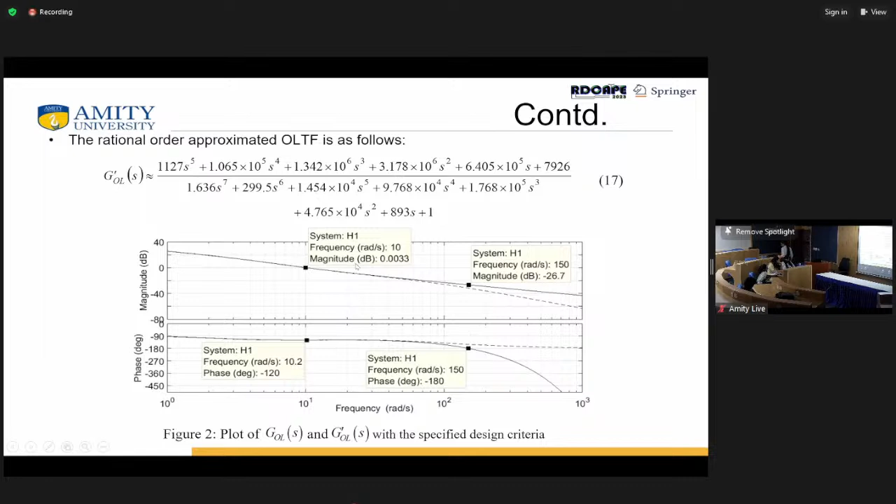Here we see that these four form the vertex of a rectangular frame, and thereby it gets its name, the frequency frame method. Now we have applied the Al-Alaoui operator for a sampling time of 0.007 seconds, and the discretized integer order transfer function of s to the power 0.8706 has been given in equation 18, and its corresponding discretized OLTF has been given by GD of Z, shown in equation number 19.

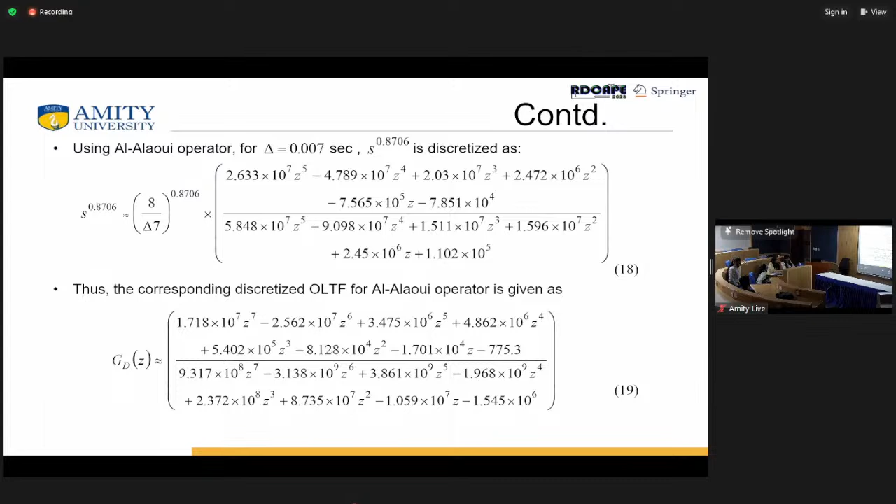Now in figure 3, we have plotted the ideal system along with the discretized Al-Alaoui approximated system, and we have seen that for the mid-frequency range, both the magnitude as well as the phase characteristics are ideally resembling the ideal system, though there are some deviations at the extreme corners, and also a flat phase can be seen around the gain crossover frequency, which is 10 radian per second.

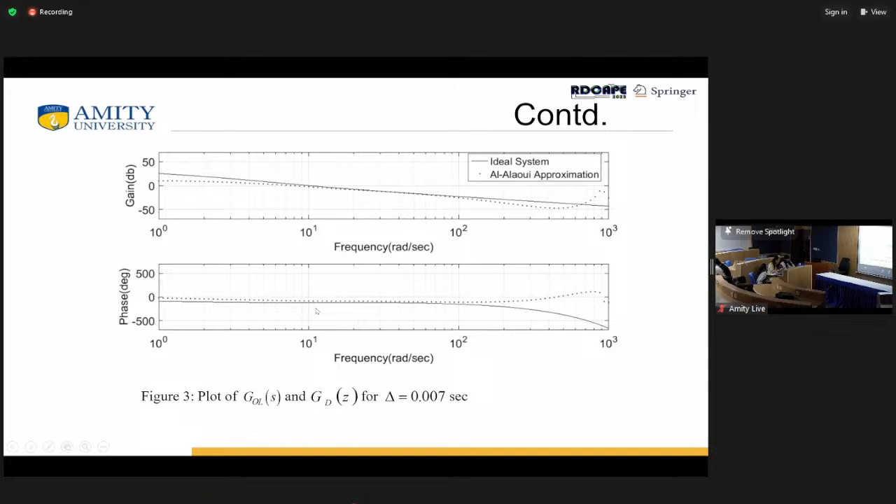So I would like to conclude by saying that a discrete FOPI controller has been successfully realized for a first order plus time delay plant by successfully fulfilling the design specifications. Then the Oustaloup approximation has been applied, which then undergoes the discrete time realization using the Al-Alaoui operator, and the result shows that in the mid-frequency range there is a resemblance with the ideal system. Also, by varying the plant gain, we see there is no change in the phase characteristics, and a flat phase is very prevalent, which indicates the robust nature.

Here are the 18 references.

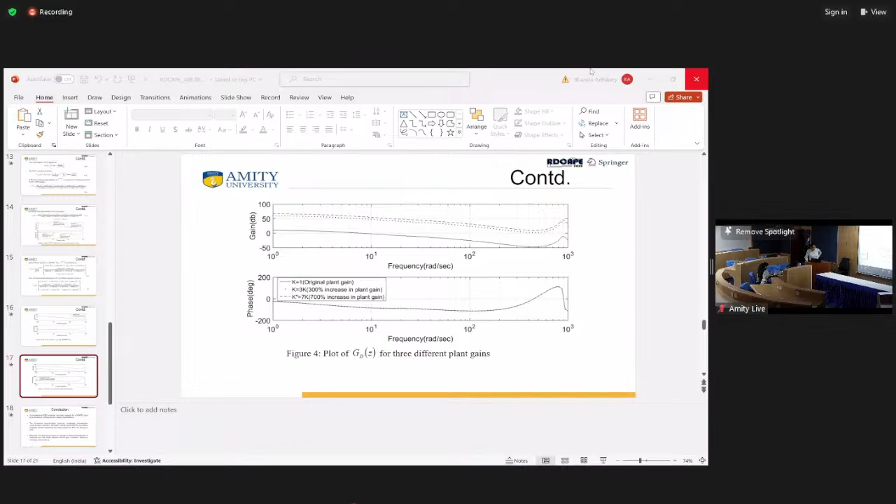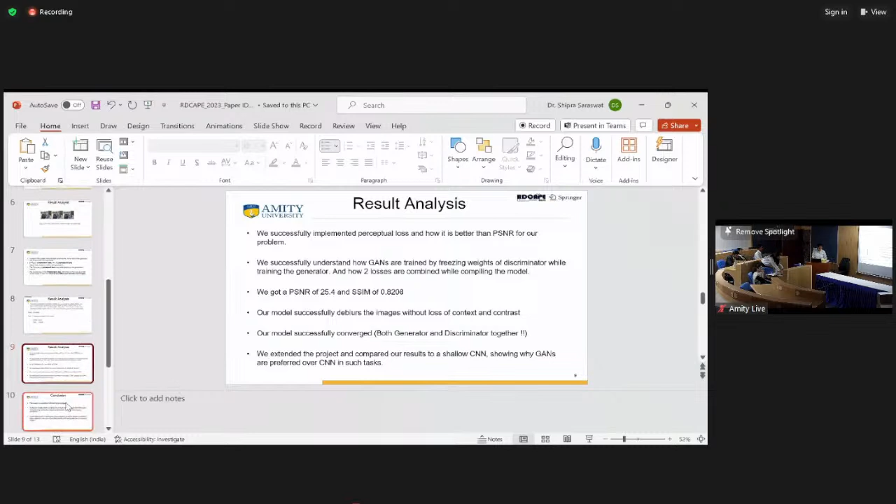Ma'am, I hope you can hear me. I have one question. Have you tried with images which are taken from different angles or different positions, or are they the same kind of images? What kind of input have you taken?

Basically, we take the database. No, we didn't do these types of rotated images from different angles. This is our future work, which we plan to use and extend this paper for a Scopus indexed journal.

The images as input are normal blurred images, and we apply the GAN to deblur the images.